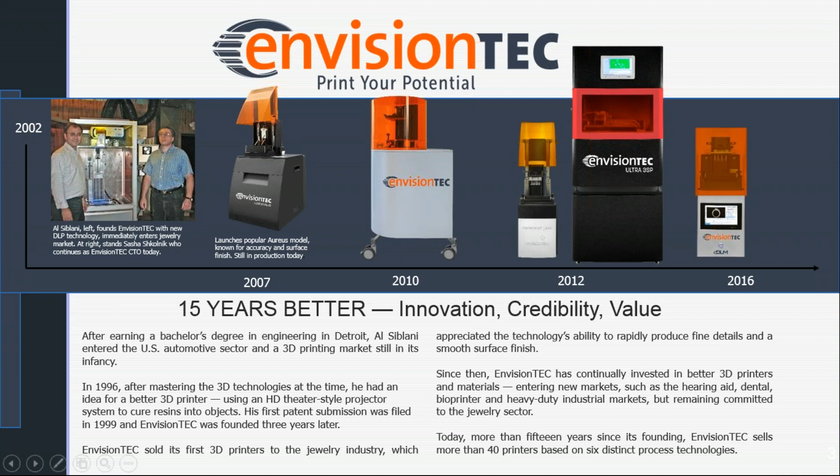So yeah, just a quick timeline on there, 2007 up through roughly current. Again, in 2002, Al Siblani founded the company, started off with a few of our smaller DLP printers and expanded technology from there. And it's been increasing ever since in terms of what technologies we offer, but then also the materials science behind them and what you can do with them.

So just to kind of go over, we have 5 core technologies, and there's a +1 there for 6, and I'll discuss why at the end. But currently, the 5 core technologies we market are bioprinting, DLP process, 3SP with our desktops, our RAM system, and CDLM, which is also a DLP-like process. But I'll discuss each one of these in depth so you understand a little bit more of each one there. Get some stuff out of the way here.

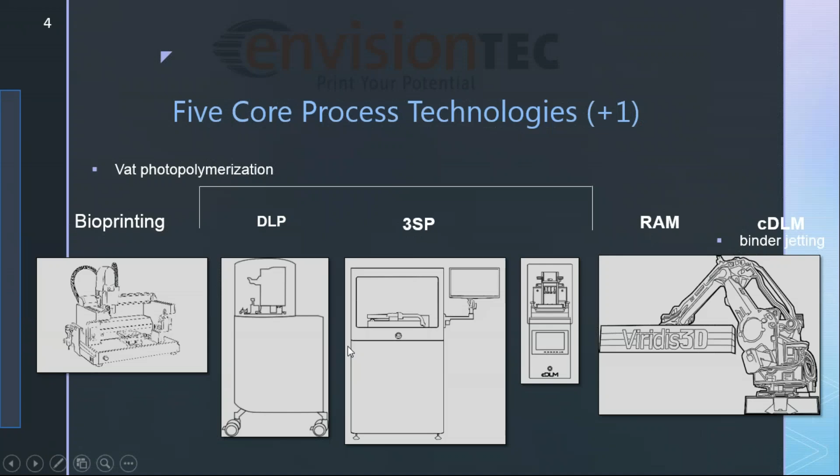So the other thing is our material selection. I won't go heavily into depth in materials just because we have 50 plus materials in our library. We've actually cut that down recently to 50 because we had so many, but we have to have a more coherent lineup. But we have materials that focus on all of these applicational categories: prototyping, dental, medical, castables, molds, tooling, again, the FDA, dental and jewelry area.

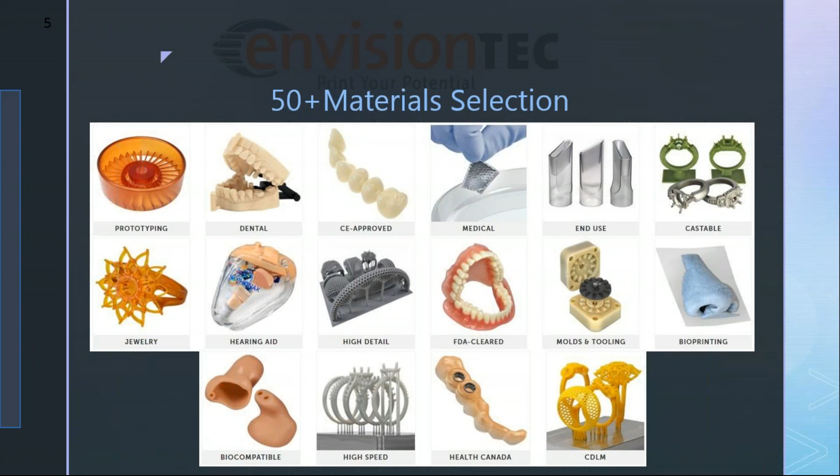So we have materials in a lot of those, and unlike some of the other commercial OEMs, we can do some formulation of custom materials if a customer so desires it. We have some guidelines around that, but it is a possibility, which is fairly uncommon unless perhaps you're a Fortune 50 type of company. So what we're best known for is our accuracy, surface finish, and speed.

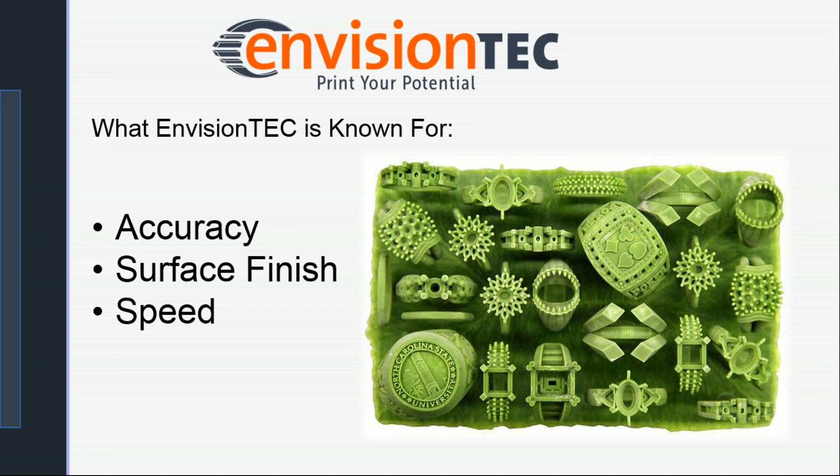Accuracy means CAD to end part, you are the closest in geometric accuracy. That's not just about resolution. It's about how accurate the part is to your original CAD file. Surface finish: our DLPs can achieve a near layerless appearance in some cases. And then speed: our DLPs are quite fast, but we also have our CDLM tech, which I'll cover, that is extremely fast in the market.

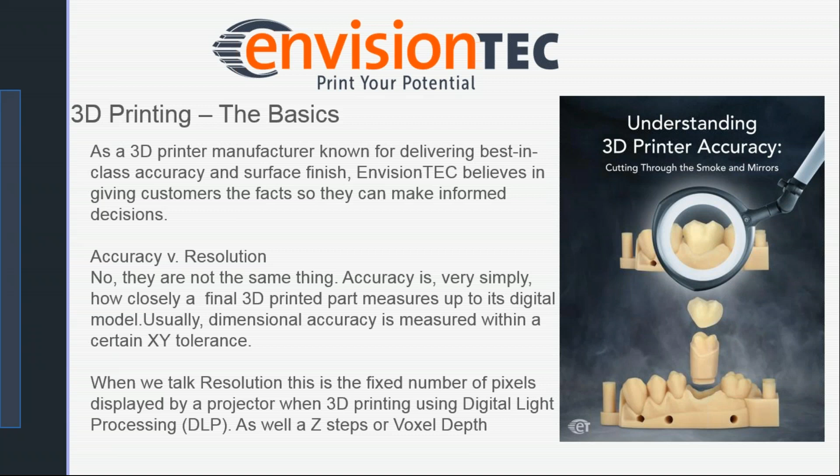So just again, a quick go at the basics. I won't read through everything here, but there's a lot of debate about accuracy and resolution. They're not the same thing. The accuracy, again, is about that XYZ accuracy to your original CAD file and how well that resolves. Resolution is more of a surface finish. Can you see the layer lines? Can you see the stair stepping? Can you see that artifact that says it's 3D printed? That's usually the difference between the two of them. So just to cover that quick.

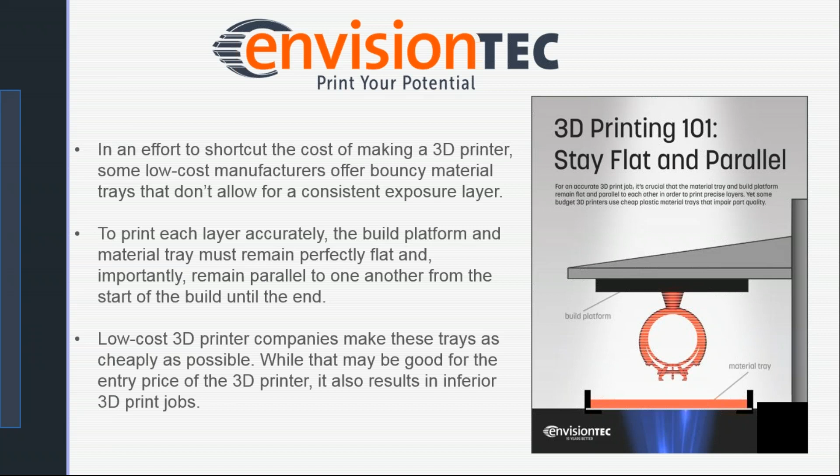And then as far as our technology, all of our projection-type technologies, whether DLP or CDLM, have a flat, either glass or rigid bottom build tray, which some of the other cheap manufacturers do not. So that does affect accuracy and overall output.

So first off, our DLP printers. That is digital light processing. Again, commercialized in 2002 by us, and we hold the original patents for the DLP 3D printing process as well. On the right there, you see a diagram of the basic mechanics. We have a build platform that rises out of the printer. It rides on a dual rail axis, so it's very stable and accurate with no movement, because one of the key things is it being extremely still and just rising in the Z. That is actually one of the only moving parts in this printer, just the Z axis rising up.

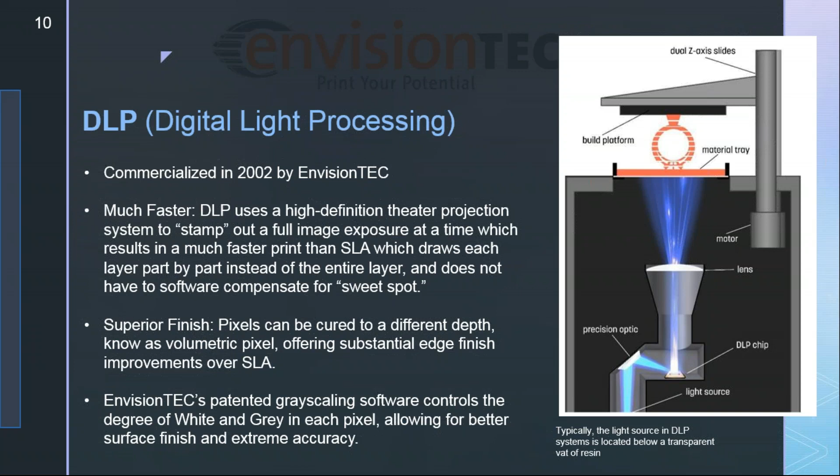So the DLP has a high definition optical projection that uses the slices. Once the print has been sliced into hundreds or thousands of layers, each layer is exposed by that projector, transmitted to a DLP chip, and projected up through our high-end optics. This leads to a faster print than, say, SLA, and a superior finish. The pixels can be cured to a different depth based on brightness. Imagine a light being brighter, you're penetrating deeper or less deep into the resin to get that layer thickness. And we also have patented software and electromechanical controls for grayscaling to help smooth those prints out as well.

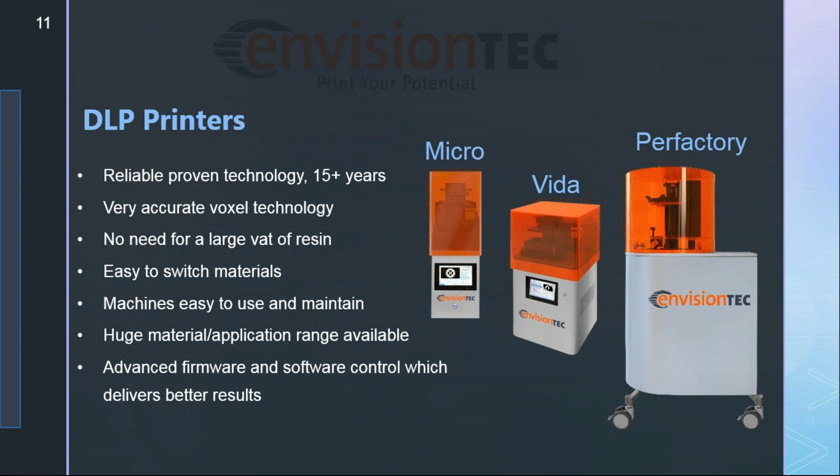We have a number of different sizes in the DLPs. This is our core technology, so it's been proven over 15 years. Accurate at the voxel level, which, if you know the term, is like a 3D pixel. Easy to switch materials, which in a lot of commercial printing gets a little difficult. But this is a tray of resin, so it's easy to pull one out and put another one back in quite quickly. Material usage is much easier to maintain, and you use the material efficiently without a lot of waste. And again, our own advanced firmware and software deliver better results.

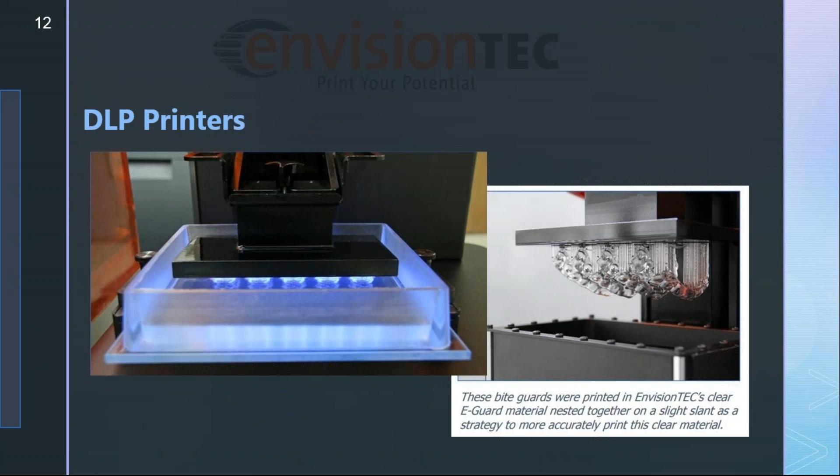This is a quick view of one of our smaller desktop printers. You can see the image of the basement there, that PSA, that rubberized tray, and the printing process occurring where the head is dipping in and pulling back out. On the right there, you can see some bite guards that were printed. They have supports holding the parts to the upper tray as it pulls up. Those supports are just removed after printing.

So, just a quick thing about SLA versus, say, DLP. SLA, that process, if you're familiar enough, is a laser fired at a galvo mirror that draws, I'd say, lithography, and that's where the stereolithography comes from. It draws on each part. It's very focal. It goes one part, next part, next part, so on and so forth.

So no matter how fast that goes, it's slower because it's hitting each part individually, kind of like the way FDM does, fused deposition modeling, that hits each one per layer, and that's slow. And it also has to compensate: if you're not pointing directly in the center, it focuses off on the side, and it causes the software to actually compensate for some ovaling that the laser has.

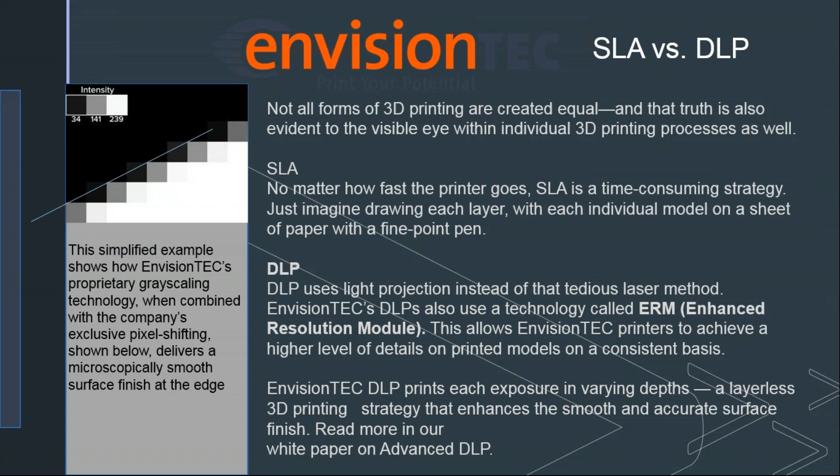DLP, however, is a light projection of that layer, so the entire layer is projected at once, one single exposure. And then we also have what's called an ERM enhanced resolution module that helps with that grayscaling I mentioned. You see on the left-hand side there, if you think about traditional computer graphics, you have your shape, and it's all built of pixels, right? But you have some stair stepping from the pixels. If they do what's called grayscaling, that tends to feather out those pixels in brightness to help smooth off that appearance.

And what that does is it kind of almost artificially improves. Well, actually, no, it's not artificial. It improves the overall layer appearance in the Z and the X and Y, to smooth off any indication of pixeling from that process. So it's actually a very nice, elegant way to do that.

So again, Kevin, there's other companies that boast having a DLP process, and those 3D printers are, let's say, cheaper in price, and I also think cheaper as far as how they're made. So I just wanted to point out the difference between what another manufacturer might have with a DLP process as opposed to EnvisionTEC, which has a true DLP process.

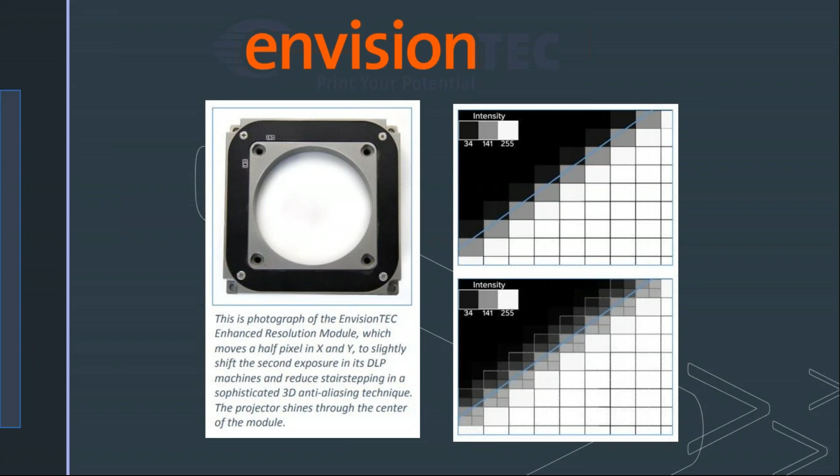Glass, tempered glass bottoms. The basements are a rigid metal, and then our trays are stretched. The tray that it actually contacts, which has a softer contact, is a pre-stretched one on a hard base, so it's completely flat. There's a lot of factors there that just improve the overall experience, the overall output.

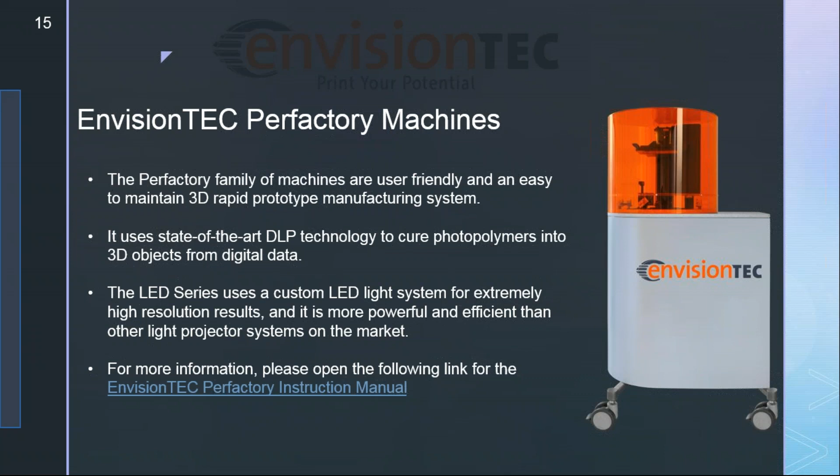They're much brighter. If they need to be, we can get more powerful and efficient projections, and it adds a hell of a lot more life. We're talking almost tenfold in the life of those bulbs, because where it may have been a few thousand hours with an incandescent, it's now 10,000 plus on an LED. So that was a drastic improvement over those machines.

This is just a quick run over of our Perfactory lineup. Again, the Perfactories are our tried and true core machines. What you might notice is that a lot of the build spaces are relatively, I want to say, small on average compared to maybe some other commercial level desktops.

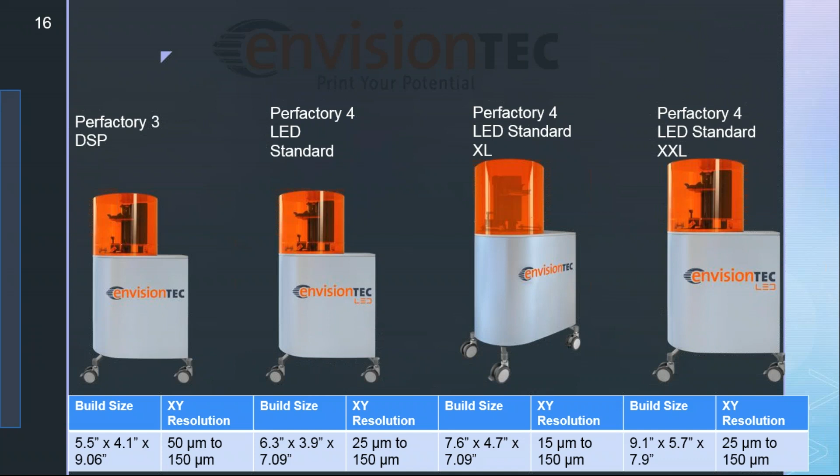But the key here is that we can do these small to medium-sized parts at extremely high resolution and tight accuracies by keeping it a smaller projection area. If you think about your projector, light goes off in a V-shaped beam, right? It's not a laser, so the larger you try and increase that image, the pixels get bigger and your resolution tends to drop out. So, we keep our systems focused on the best size for the best accuracy and resolution. So these are our larger, standard Perfactories.

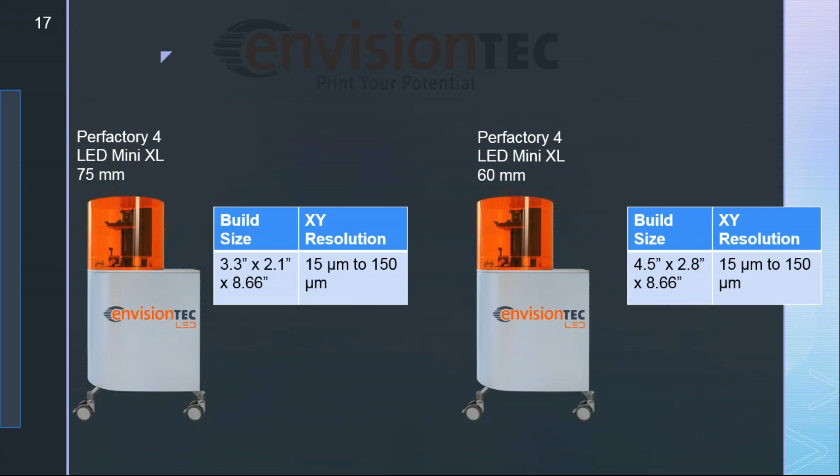We also have our minis, and a lot of these minis tend to be smaller builds, but we're getting accuracies in the XY from 15 to 150 micron, and then Z steps. Our Z step is also dynamic. Depending on the material, you could be getting 15 microns up to 150 per build, depending on what you want to do. So that is material dependent. Some materials can only do 25 or 50. Some we can push down to 15 in the Z, but the accuracy, we're talking 15 to 150 in the XY.

Our desktop machines, so these are obviously just smaller tabletop ones versus our freestanding Perfactories. Still higher end optics and higher quality hardware overall. Still a dual rail system internally on the Z-axis, but again, these are just a smaller tabletop version. Easy to maintain, affordable to operate, still very effective on material usage, because you're just pouring in a little bit more than what you use for that build, and then you can save some of the material as you go.

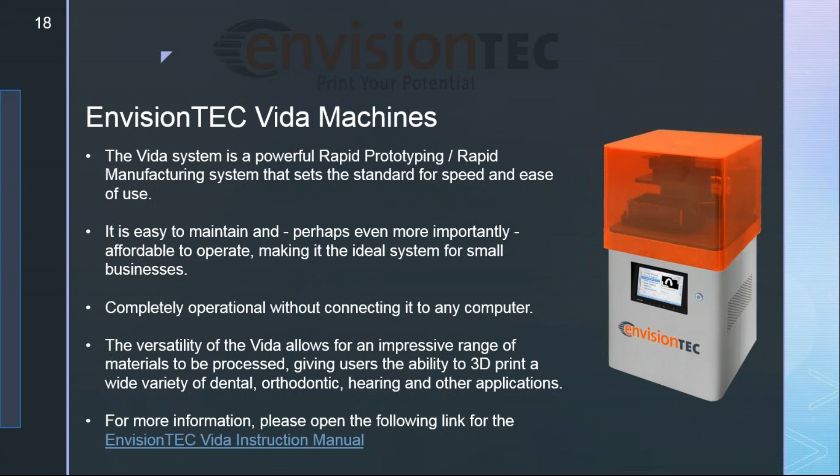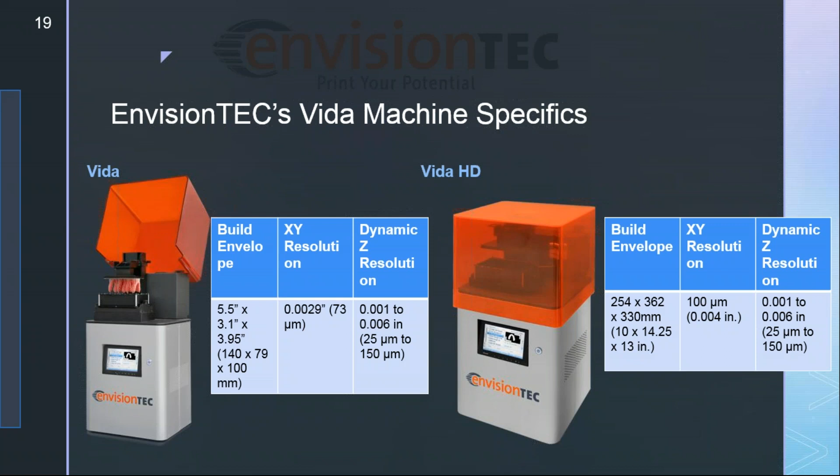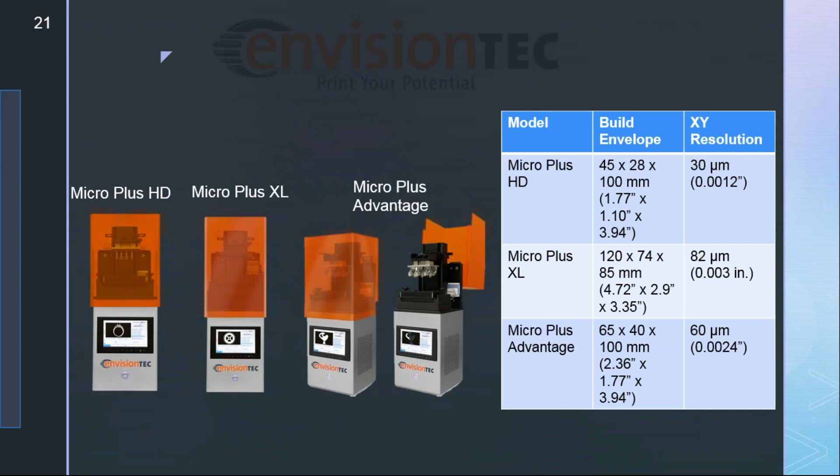And then our micros, which are, again, smaller, more popular. Dental and jewelry have been more popular there. But if you need to do small, high accuracy, really high res parts with, say, small fluid channels or details that another machine just cannot pick up, this is where you're going to see a real benefit. These micros, you're talking maybe like 4 inches in the Z, but then closer to 2 by 2 or 4 by 3, smaller builds. You can see the accuracies accordingly on the side there.

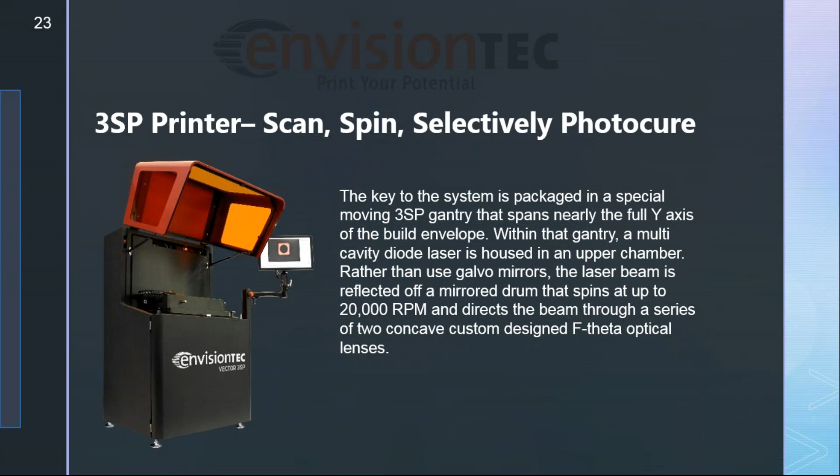So that's our DLP, and then our other technology, which most people are not as familiar with, is our 3SP technology. That's scan, spin, and selectively photo cure. These are our larger bed systems, so we're talking 7 to 8 inches up to 18 inches cubed in our largest machine. This is similar to an SLA in that it's a laser-based vat system, but it uses a completely different methodology that actually increases throughput, sometimes 5x, depending on the number of parts. Instead of using galvo mirrors, the beam is reflected off a laser mirrored drum spinning at 20,000 RPM, and then it goes through 2 lenses.

So this system, if any of you are familiar with, say, jetting technologies where you have a head sweeping across the bed, it's almost like having the benefit of speed and hitting the entire bed per pass, versus SLA being, again, very focal on each part. So even though the speed of, say, printing one small part in the center of that machine versus SLA may be close, we're probably still going to be faster.

If we had to do 20 parts on the same table, we're going to be way faster because we're hitting all of those parts every pass as we go. So we're getting a lot faster, a lot more throughput. And speed and throughput, again, are kind of two different things. It's the speed of print, but then also how many can you do in that allocated amount of time.

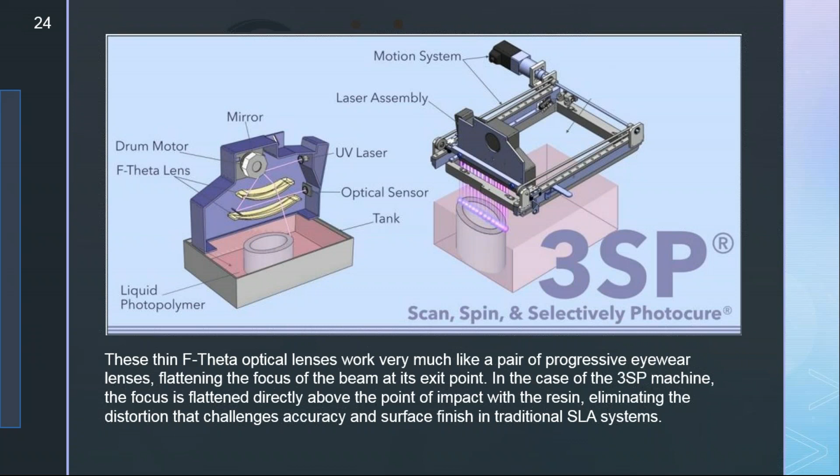There used to be a PSA, what we call a stretched screen, like a thin layer across these types of technologies, and our Ultra. That is no longer there. This is a direct contact to the resin. So we get a super smooth mirror-like finish on the up-facing side. So any flat surfaces, anything like that, they are shiny right out of the printer. Really nice finish right out of the machine.

Launched in 2013. They're much more efficient and faster compared to SLAs. One fifth the operational cost of a lot of the bigger ones, say from 3DS. And then we're constantly making improvements as we go. We've moved from the PSA system to a blade, as I mentioned before.

And then again, big high production dental. Right now, we have a lot of dental labs. They'll just do whole trays full of teeth molds that they're pulling from someone like SmileDirect or Invisalign, those types of companies. So again, this is a little bit better, more geared for larger pieces, manufacturing usage.

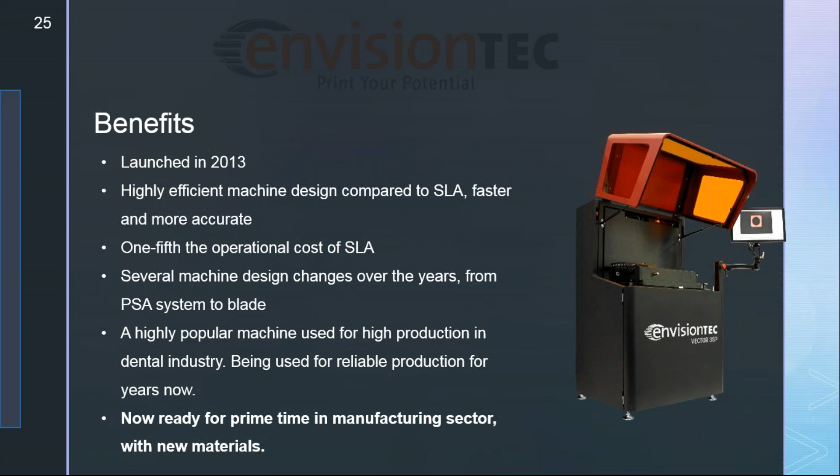We have materials that have borosilicate glass in them for our E-tool. We have investment casting material, and then some other high performance prototyping resins. It prints up to 18 inches cubed in our biggest one, without sacrificing that finish. Low cost multi-cavity diode laser. We've now improved that laser; we've seen no dip in power over months of use. Self-calibrating, the ability to use multiple materials, and different vat changeouts if you want.

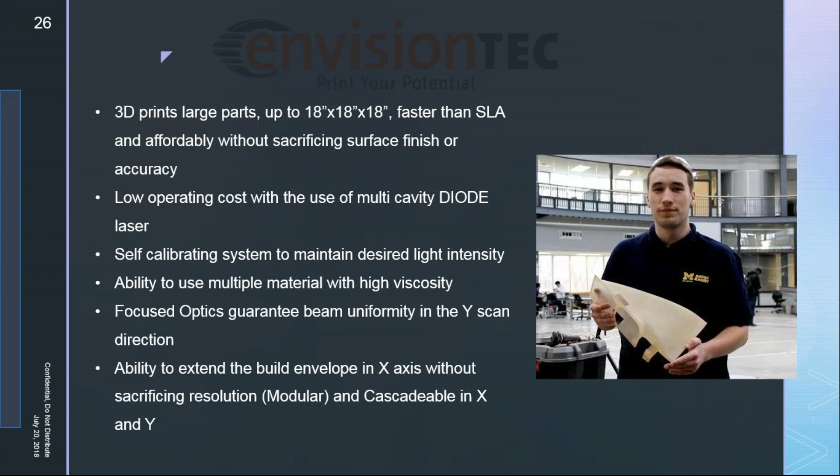And we have resolutions: in our Vectors, we're getting between 50 to 100 micron options for your Z, but then we're down to even 25 microns in the XY accuracy and resolution in, say, our Vector UHD, which is a newer unit, but for a larger frame machine, that's pretty impressive. You can't get that in SLA.

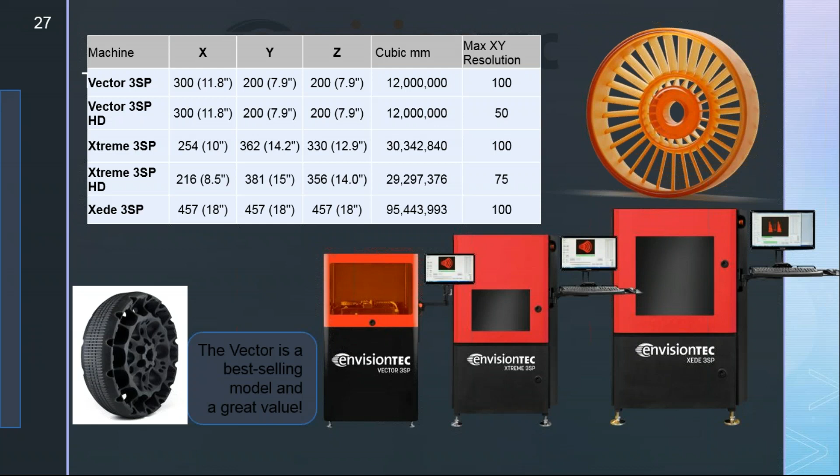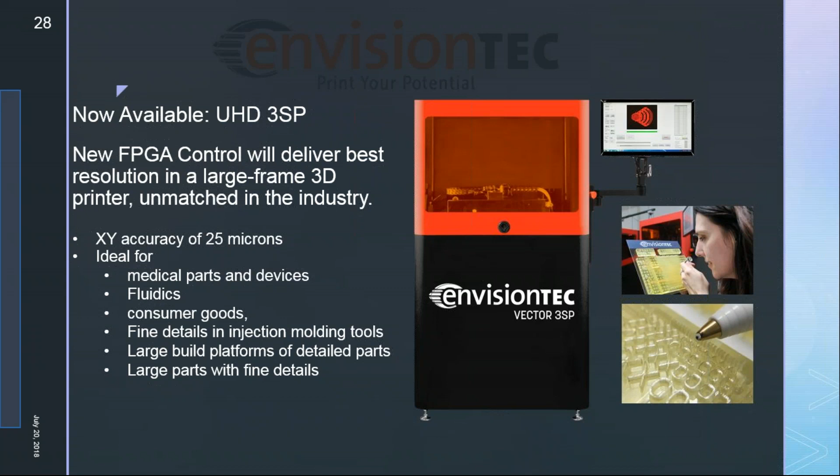This is a view of that new UHD 3SP. We have a new control board, new lasers, and that picture in the lower right there, that pen tip. We have this tester block we did, and you can get text. I would say that's probably down to about 8-point to 6-point font size. And then we can also get textures and stuff that you probably would never see on an SLA.

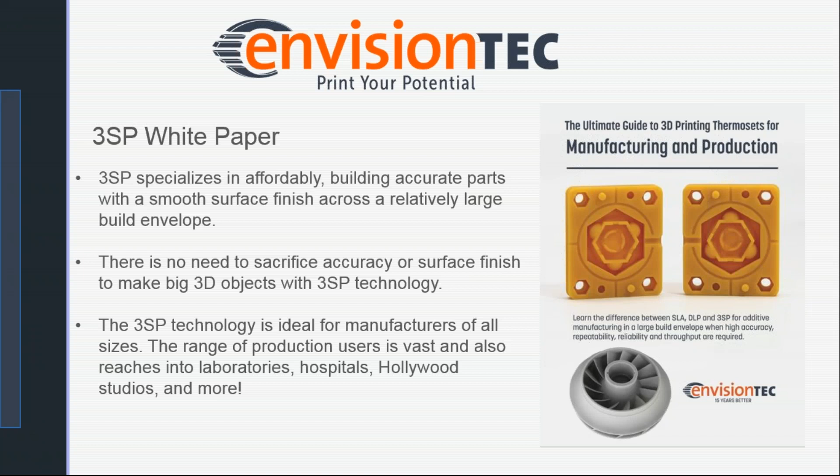We have some white papers on this one. On the right-hand side, we have our white paper you can download from our site. It has a lot more info on it. Right there, you can see an image of our E-tool for a 3D printed injection mold that we can do in that material.

CDLM, this is one of our interesting ones. This is the technology that we've had since 2006. The patents were filed, but you may recognize this technology from Carbon, because they actually kind of took this technology and ran with it after some of our original patents came through. But they're obviously still leasing their machines. You can buy ours in this Vida CDLM or Vida HD.

So it is the fastest technology offered. This is continuous Z-axis, meaning that it's constantly moving up, as opposed to moving up and down the way our DLPs tend to recoat those parts.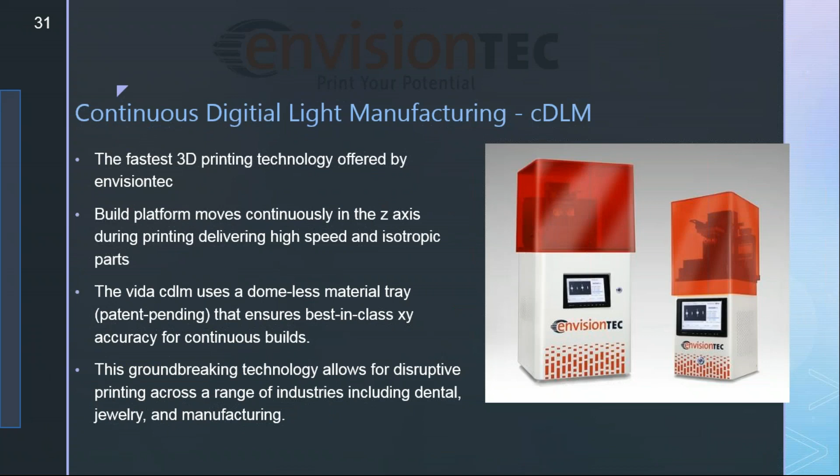And then we also have a patent-pending domeless technology, and what I mean by that is the base at which, I'm going to go forward one slide here. You can see common continuous printers, this is more referring to the competitor technology, use an oxygen interface layer that inhibits curing in that space in between, but it's allowed to happen just above it. And this allows for an extremely fast print. We're talking like 3 inches per hour plus on a lower resolution.

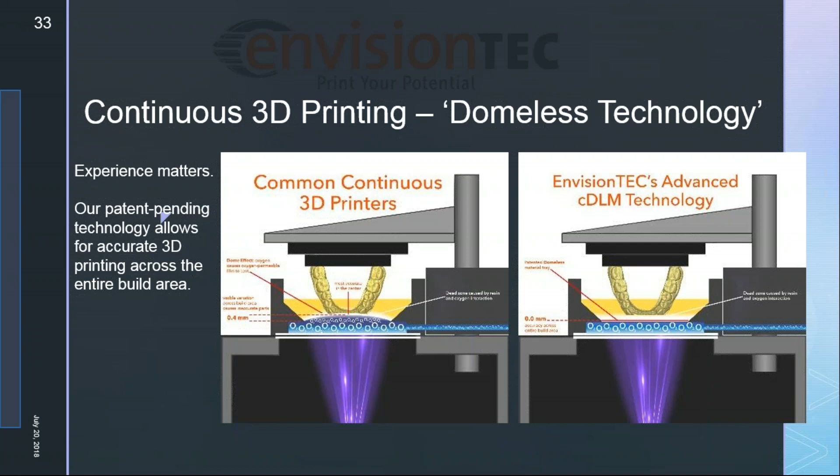But what they have to do is actually compensate or lose some accuracy, because that permeable layer they use is flexible. So you get like a 0.4, 0.5 millimeter bubble or dome that's created by that pressure from the oxygen being piped in. But we have a rigid base, so there is no deflection of that base to compensate for. This allows for faster, more accurate printing in our technology. And this technology is probably going to move slowly into our bigger machines as well as we go.

So again, the key benefit of this one is just speed. It is an isotropic part, meaning that X, Y, Z strengths are all the same, versus say FDM that has layering and stuff that may be not wanted. And then again, we filed this patent. We've had this technology in development for quite a long time. So we are, I would say, experts in this field to do these extremely fast ones.

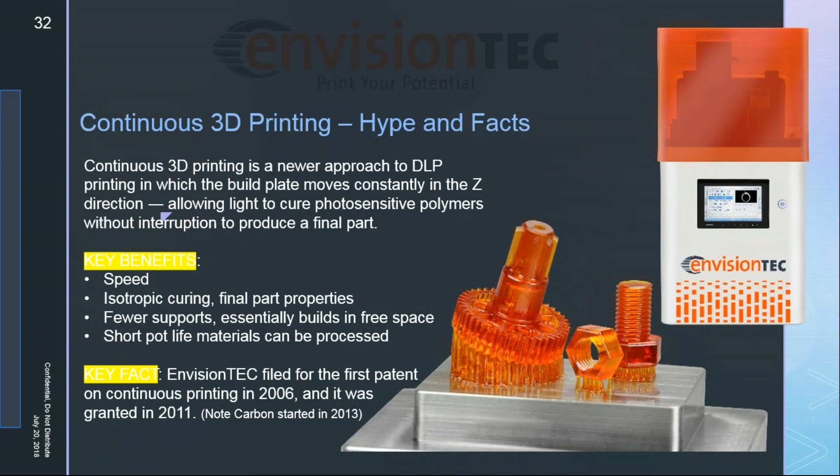It's been the most popular in jewelry and dental, because we have these jewelers whipping out trays full of rings in 2 hours, and then they're right to casting them. So that's why it's been such a huge boom in that area. So you can see our Micro and our Vida HD cDLMs. Again, small build spaces. The Vida is probably the best of the bunch in terms of size. You're not sacrificing a heck of a lot in terms of XY accuracy and resolution. But if you want handheld size prints really fast, those Vida and Vida HD ones are terrific options.

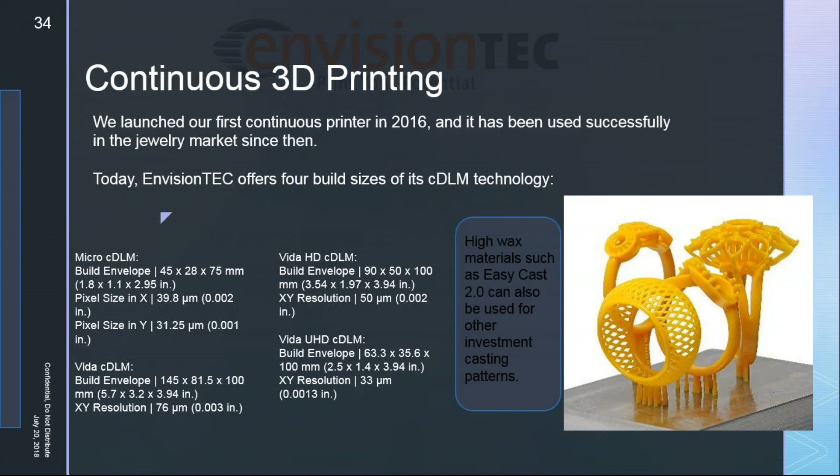And we have an ever-growing list of materials for this one. High wax content ones for casting, as well as just prototyping materials, so you can get your models out a couple builds a day. That's the gain right there.

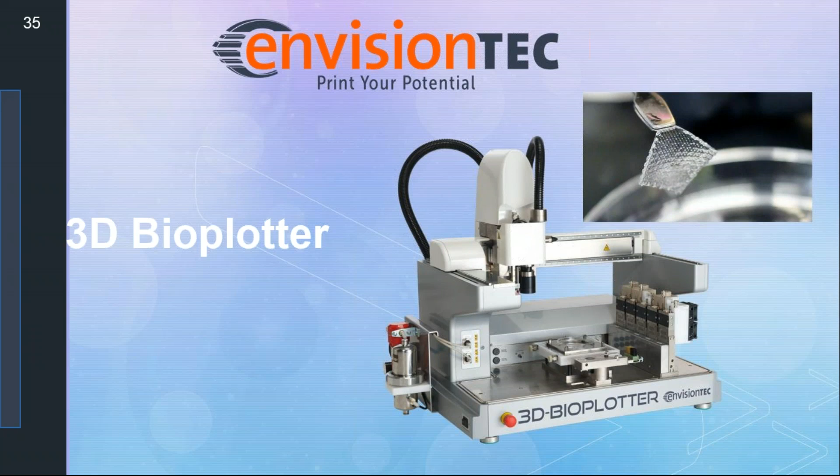So our 3D Bioplotter is one other piece of technology. This might seem more limited to the bio space, but we've had a lot of schools and institutions use it for other things, because it is an open source printing machine, though it's almost like a piece of lab equipment as much as it is a 3D printer. This one's been around for almost 18 years, and it is probably the household name in the bio industry. Most people know the Bioplotter just by name, and sometimes it just kind of sells itself that way. It comes in 3 different sizes.

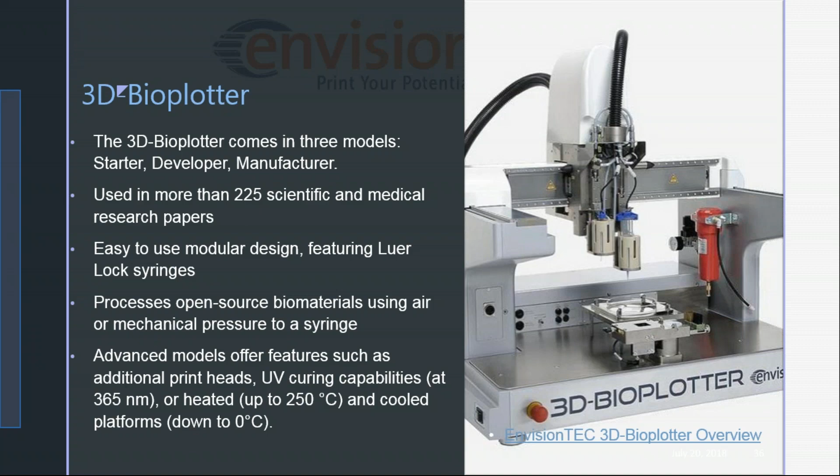We have 230-ish published papers, and published papers are a commodity in the bio and pharmaceutical industry for all those use cases being tested. Once those papers have been published, it gives them precedent to work from. The next competitor in this area, you're lucky to get 20. So we're talking 10x the amount of published papers out there. Easy to use, from entry up to commercial level. It has multiple features like UV head, heated and cooled platforms, heated and cooled heads.

Its main purpose is regenerative medicine for the most part, the fabrication of bioresorbable scaffolds. So if you've ever heard of printing organs or growing organs, for the most part, it's building a lattice on which those cells grow. So think of an organ or a liver or something like that. They can make a scaffold, seed that scaffold with the proper cells, and then it grows from there in a petri dish or otherwise.

And some of these scaffolds are made out of a material that can dissolve in the body, to effectively allow that bone or tissue to heal. In the end, it's the patient's own tissue, their own body, because that's the end-all be-all instead of something artificial. So bone regeneration, cartilage, soft tissue, drug release, organ printing, those are its main uses. It is like an FDM printer, but it is a pneumatic system, meaning that it's syringe-based with air pressure pressing that syringe down to extrude the material.

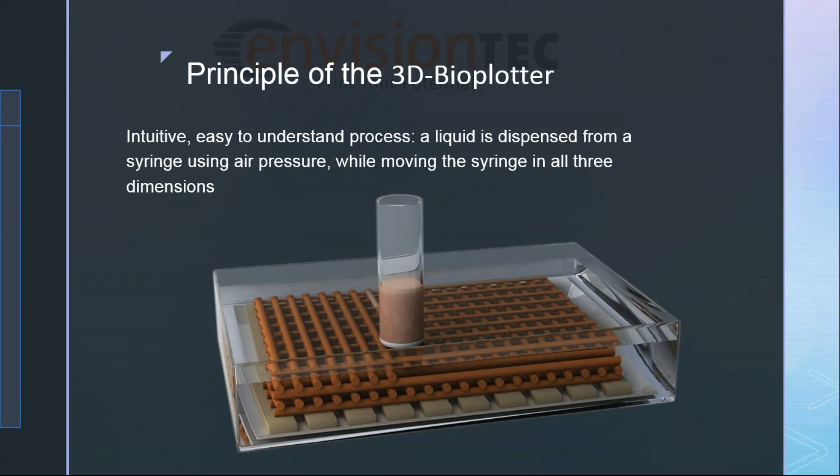That allows for sterile air, a sterile syringe to be able to put material down, especially if there's live cells. And that obviously is where, if you're printing into, say, a gel or into a petri dish, you're not worrying about a filament or something coming through that could be in contact with something, and you have no control over it.

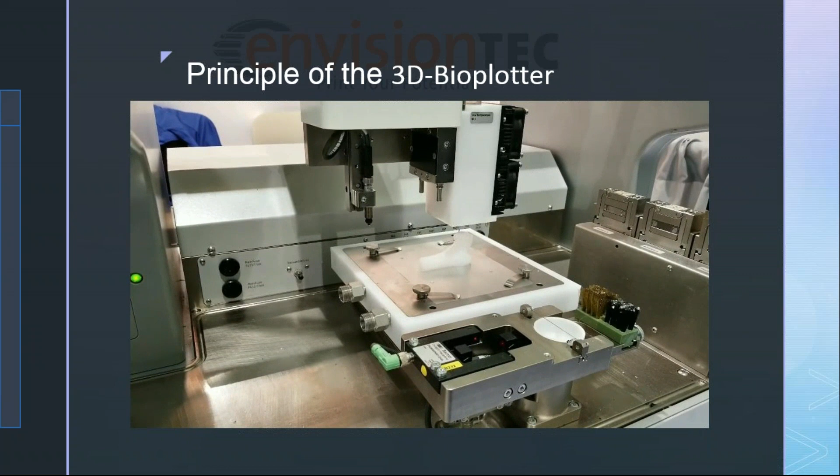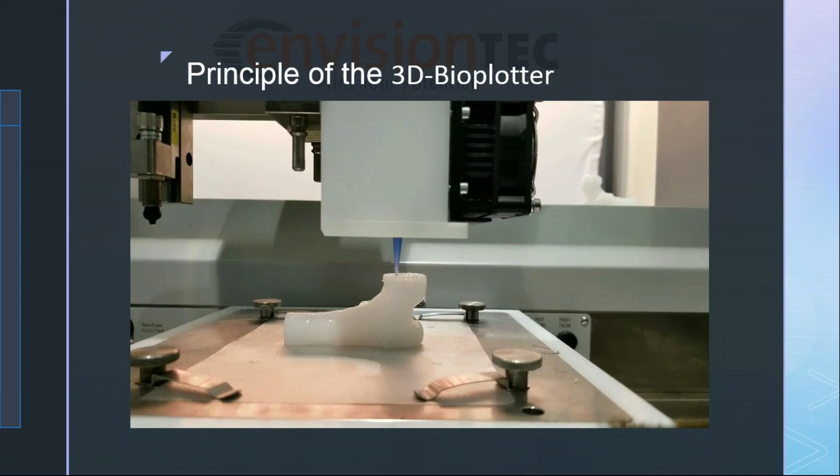This is just a quick video of it printing at one of our trade shows recently. This is our developer series, but you can see the polypropylene Nordson tip extruding a silicone. Extremely fine movement, quiet, as you can kind of hear, very exacting, and that's just tooling silicone. We actually have a medical grade silicone as well. And so what that does, you can print into wells, fixture plates, all that stuff.

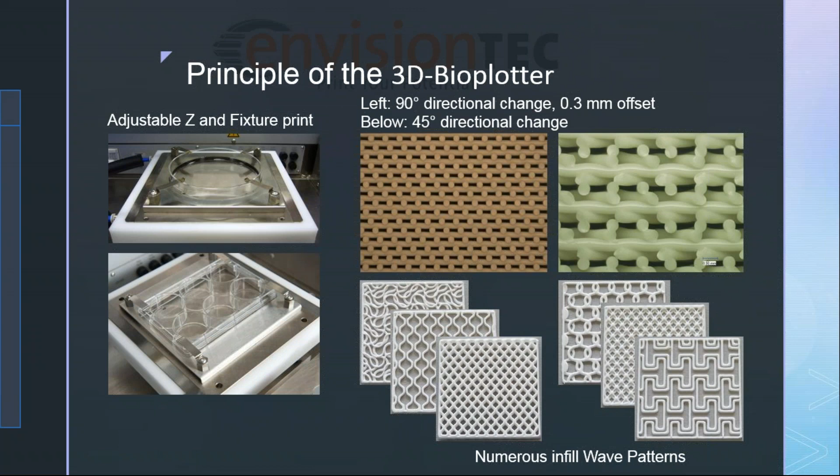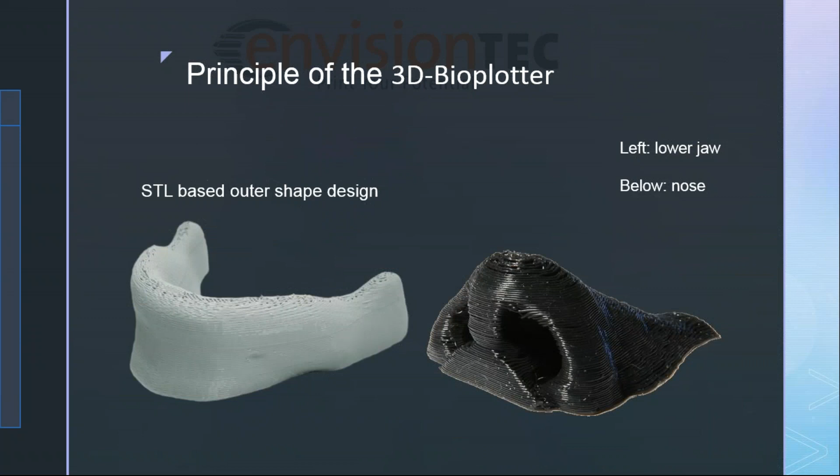The software, you can see an example of patterns. This is actually just a square STL, so square shape, but the software can actually do these ornate patterns. And the reason for these is to allow for nutrients and cellular matter to infiltrate into those spaces the way you want them to, so then they can grow properly, vascularize. This is a whole other array of science here, but those are all very interchangeable manually, and it's an interesting application.

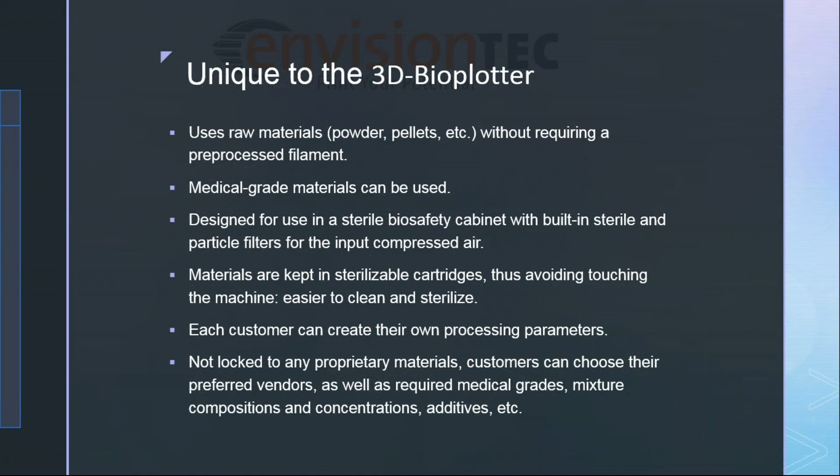These are like an outer shape of a jawbone there. You see a nose printed out in silicone. But again, these are scaffolds to grow the real thing. It's giving them a shape to grow into, right? So it uses raw materials, pellets, powders, etc. It is an open source machine, so it's meant to be using your own materials. Medical grade stuff's available, and then we have a cabinet if you need it, sterilizable cartridges. Again, you're not locked to anything. We have materials, but you're not locked to it.

These are the array. It also prints in metal. If you have a metal paste, you could do titanium or stainless steel or something like that, as long as it's mixed into a paste and you can get it the right viscosity to extrude out of the machine, so it can stand up under its own viscosity, whether it be cured or whatever. You can then sinter that out, put it in the sintering oven or evaporation. So we have folks doing titanium or graphene or possibly small steel parts. You'd just be compensating perhaps for the shrinkage of those pieces.

So yeah, we're in the middle of a benchmark for a customer with one of these, and ideally what they want to do is print this metal material that's a conductor onto these transformers, which are maybe 1 or 2 inches in diameter. And the first step was just completed on the bioplotter, which means that it will print that metal material that they need. So the next step, and it should be able to do this, is to print it onto the transformer itself. So that's an interesting application for manufacturing more so than medical with the bioplotter. So if anybody out there is thinking outside the box and has a similar application where that could work, let us know.

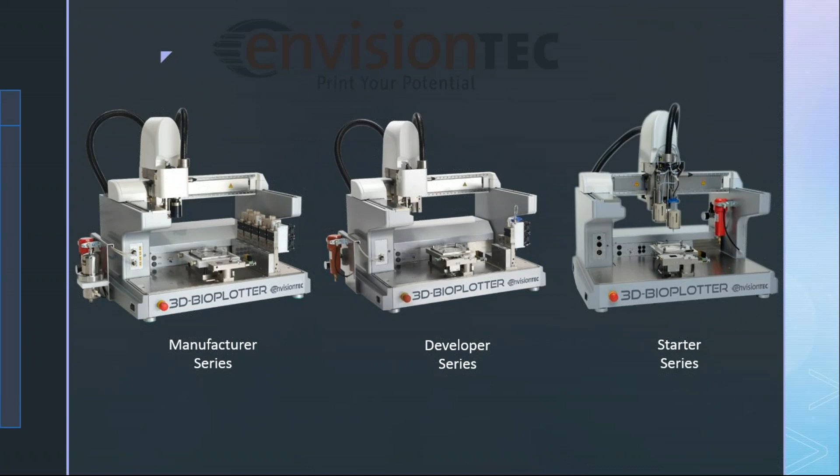Right. So, yeah, this is a view of our 3 series: a starter series, developer, and manufacturer. Obviously, the manufacturer is the one with 5 parking spots, sterile and particle filter, all the bells and whistles, a camera that can record every layer. So an interesting piece of technology. 1 micron accuracy movements in the X, Y, and Z. It is a magnetic drive. There's no pulleys or screws. This is all a magnetic drive.

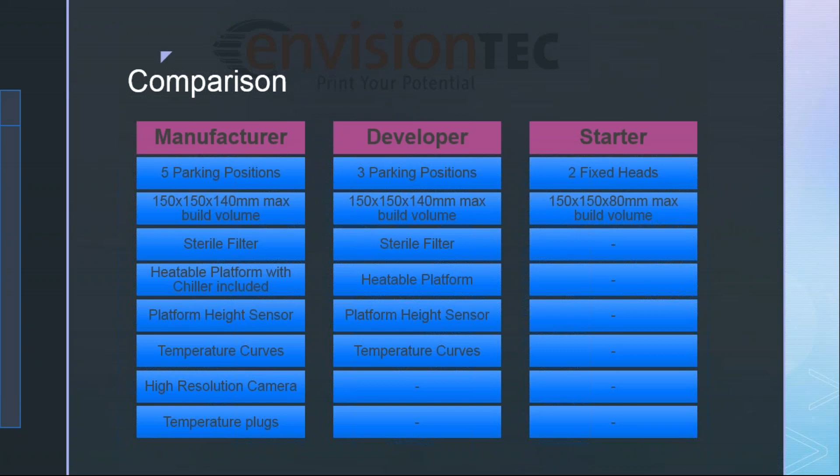You can kind of see the options there. The manufacturer has just about everything. The developer's that mid-range, good model for most people. The starter's there to compete with some of the entry-level things coming up with fixed heads and just have a nice pneumatic system.

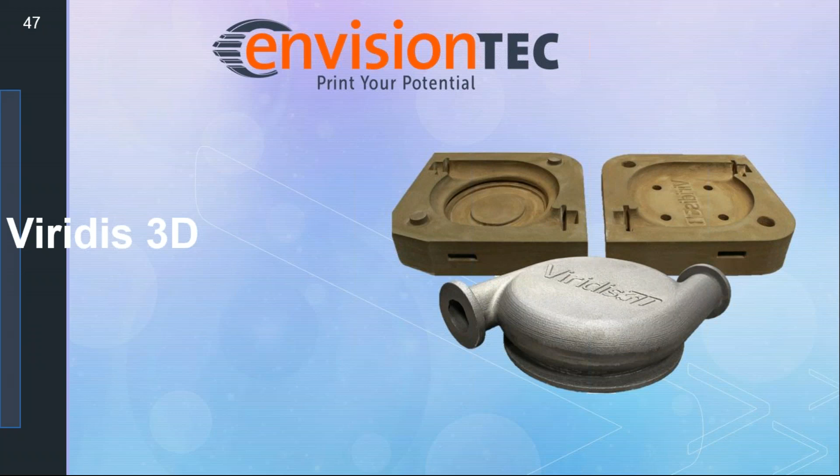Again, we have all these research papers on our website. You can go to the 3D-Bioplotter site and then 3D-Bioplotter research papers, and then you can sort by year, author, keyword, and find something if this is your kettle of fish, so to speak.

Viridis, one of the other awesome ones, in departure from the resins. So this is our sand printer for sand casting.

So it is Viridis out of our Woburn office. This was a small firm that was an acquisition by us a number of years ago, and so their focus is this robotic binder jet system for creating sand casts. So RAM stands for Robotic Additive Manufacturing. We were the first to release any robotic system out there.

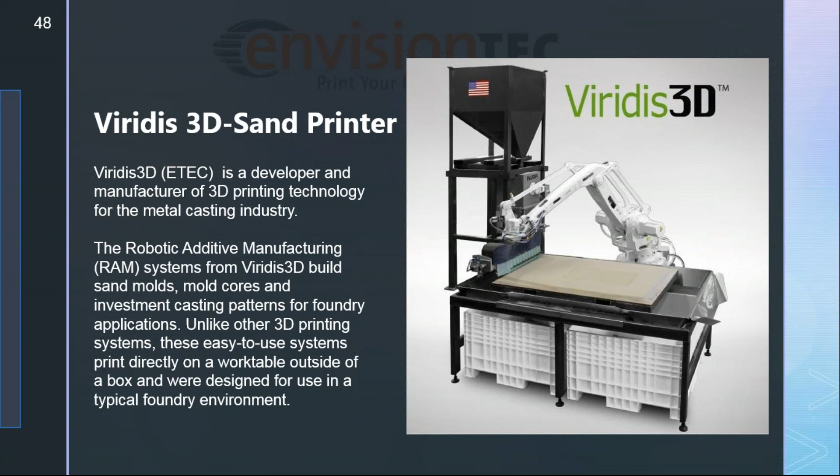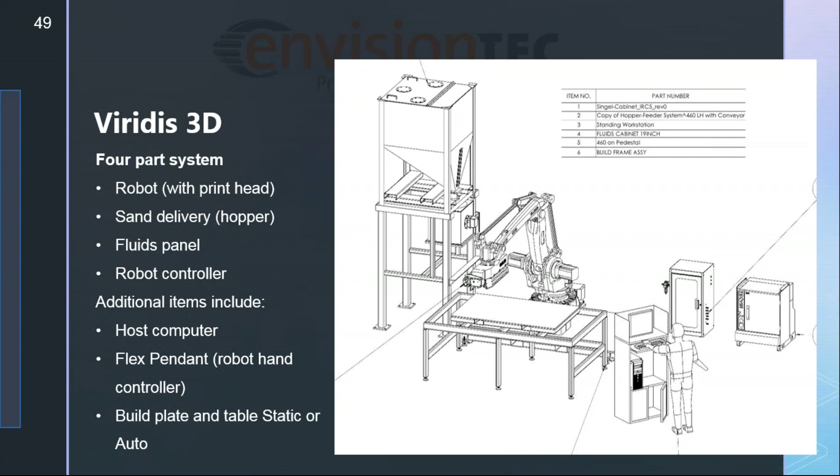You have the sand delivery system, which is purely just the sand hopper that goes and retrieves sand, the fluids panel and control, and then robotic, and then we have the computer and some of the build table that may be optional for an automated one versus a static one. This is just a diagram of this.

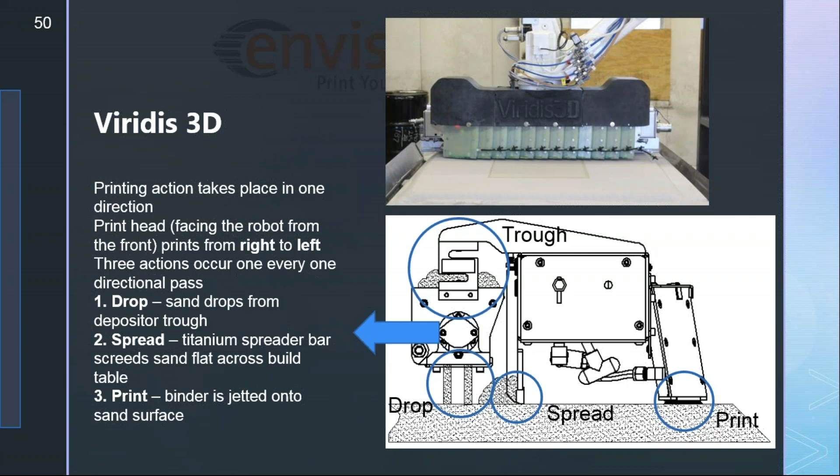The print head is where most of the science and application is. The side view, you can see there's a trough full of sand, has a spinning screw that helps drop that sand in front of the spreader. Spreader spreads it flat, comes behind with an array of inkjet heads. So it's dropping the sand, spreading it, and then printing a binder, which is a Furan binder, on there to get the sand to stick together.

A sand mold is made up of this sand, just dry sand, with the modified binder jetted into it, and the sand itself has a dry catalyst mixed into it. And that's just via auger. It's not something that's sprayed into the sand, it's pre-treated. So we have the liquid binder, that's the Furan, the sand, which could be your traditional Oklahomas, Wedrons. We're working on ceramics right now too.

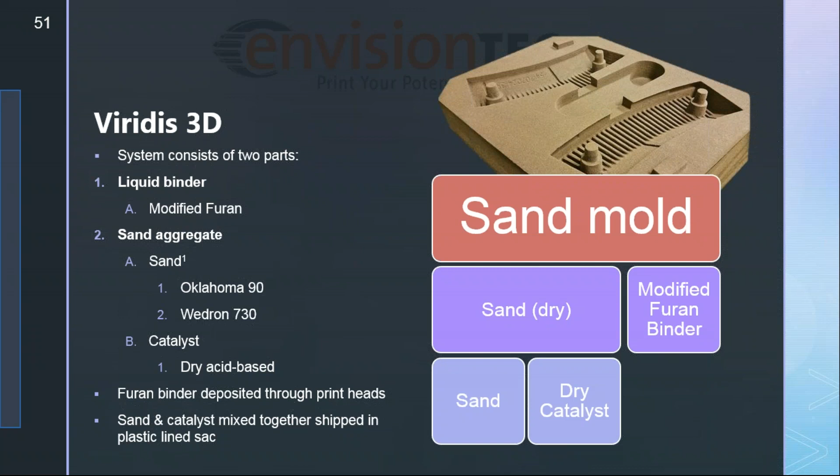So we have a 123 and a 224, and then a 236 and a 336, either 12 to 16 print heads, from as small as 1 foot by 2 foot by 3 foot up to 3 foot by 3 foot by 6 foot, depending on the build out.

And that actually is not the end all, because the robotic system allows for growth, and we have a system just recently custom made with 24 heads for someone who wanted to do these giant propeller investments that they had to do in multiple pieces before. So that was a terrific example of not being in a box. Unlike traditional 3D printers, this allows for that kind of growth.

Again, that's the ABB IRB 460 model that it's hooked to. Some people are like, well, isn't a gantry system more accurate? Its positional accuracy is 0.2 millimeter, and its path accuracy is about 0.1 millimeter. So it's full Cartesian movement. So it's probably as accurate as most gantry, if not any high-end commercial systems.

Silica's, again, foundries are moving away from silica just due to some OSHA requirements. So ceramics are becoming more popular. We can actually use your own mixes. We just have to vet some out and make sure it's going through the head properly. And so that's a huge gain too, because you can use your own sand. You can reuse it because it's just dropping away after it's been brushed out. And then we just use our binder that's viscous enough to go through these inkjet heads.

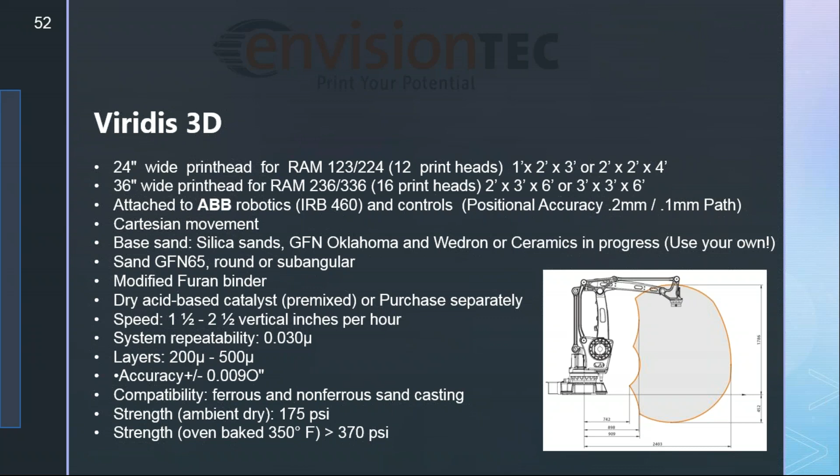System repeatability was 0.03 overall, and then layers 200 microns up to 500 microns. That's slightly adjustable as well, depending on the sand. Overall accuracy around 9 thou. So for most sand casting, that's perfectly fine. And again, this is for non-ferrous or ferrous sand casting. You can see, again, just an exhibit of what that looks like in our unit.

The competition out there, we're talking about ExOne or Voxeljet. Voxeljet can't sell into the U.S. right now because of ExOne's patents. An installation of an ExOne in a similar size, you're talking a $1.5 million investment, almost like a metal machine. This one is less than half of that. We're talking like 500 or less.

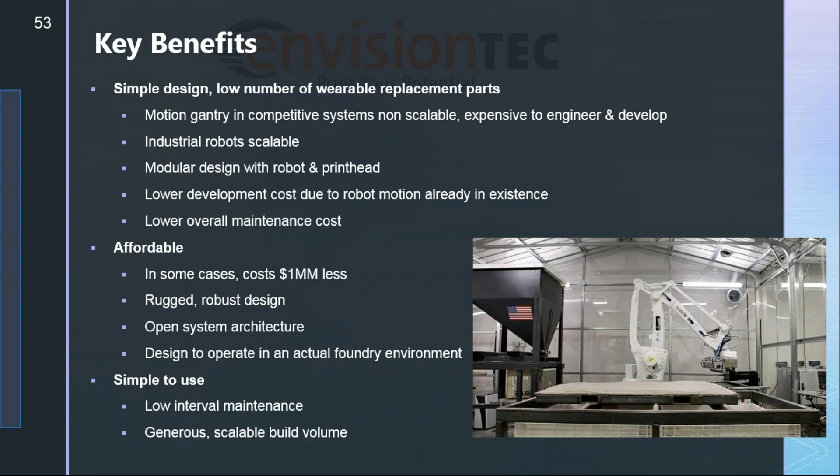So this gives companies, small foundries, a way to compete in this market, or even companies that have their own foundries, that maybe they're a pipe and valve type of company and they make their own stuff, like someone like Victaulic or something like that, that have their own foundries. This is something else they could look at to keep it in-house.

Lastly, this is kind of the plus one, our SLCOM. This is still in development. We unveiled it a couple of years ago in 2016, and we've still been finishing off some development, but we're currently seeking some folks that may be looking into some beta siting of this.

This is selective lamination composite object manufacturing, a little bit like LOM. If any of you remember, we're talking 20 plus, almost 30 years ago, laminated object manufacturing. Similar idea, but this is actually a 4-axis machine to print in pre-preg composites like fiberglass, Kevlar, carbon fiber, so you get exceptional toughness from the parts, environmental, vibration dampening, all that sort of thing.

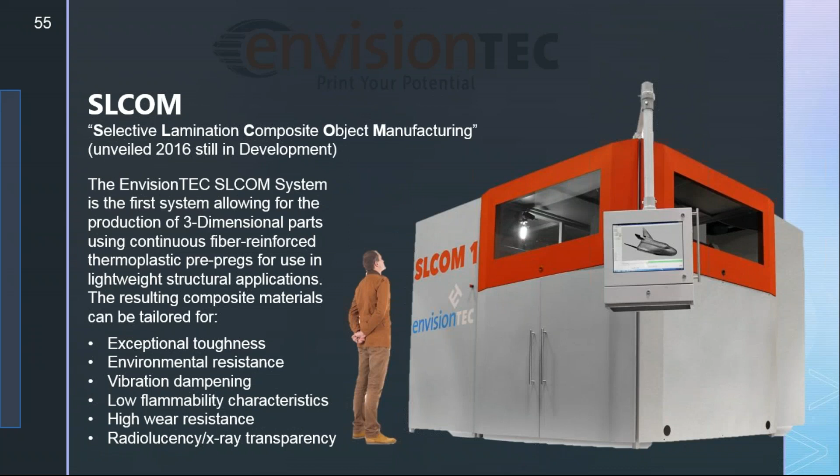It's obviously a desktop one, right? So big machine. I have a big desk.

Yes, it uses a rotational table as well as the three-axis gantry system. You can see it by the size of the part compared to the rest of the machine. It uses an ultrasonic cutter to cut away material after it's been laminated together. Pre-pregs already have the resin embedded, and then it has to be heated for that resin to kind of melt before it cures.

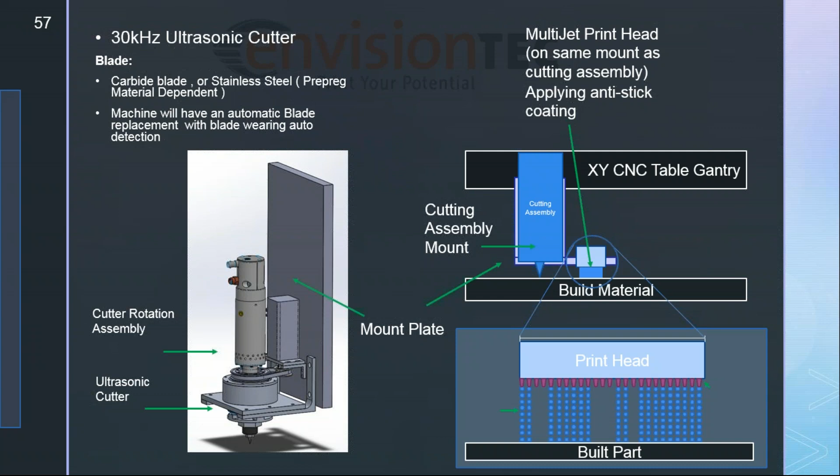This also has an inkjet head that's essentially a non-stick, almost like an inhibitor for that lamination, so the excess can be cut away by the head after it's been stuck together. High heat, so with pre-preg carbon fiber we're talking several hundred degrees to make it work. So this is just the preliminary specs of it.

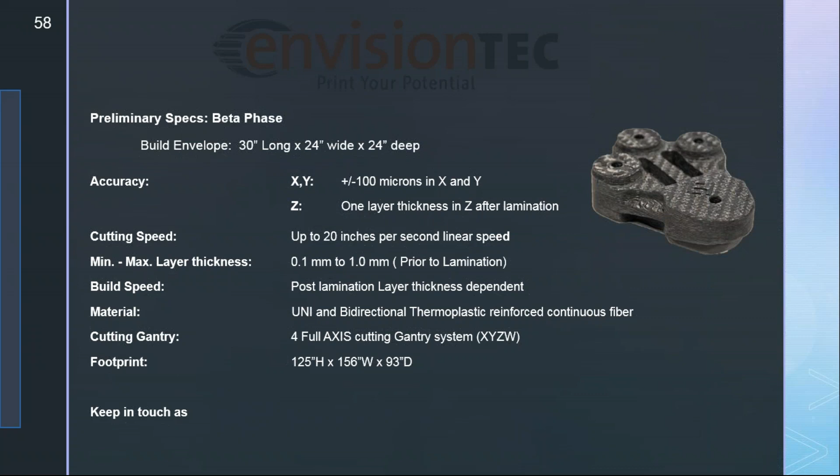We're talking about 100 micron accuracy XY. The layer thickness is as thick as a single layer of whatever you're using, be it carbon fiber or fiberglass. Cutting speeds up to like 20 inches per second, and some of these things may change as we move along. Again, it's in development, but it is a very unique technology to build these laminated pre-pregged parts. So you can imagine in automotive or aerospace, this would be of huge interest.